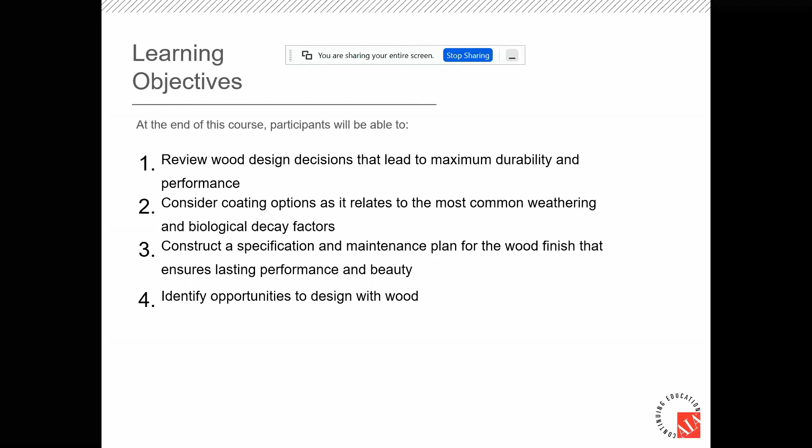So let's start with the characteristics that wood offers as a building material. I think you'll agree that wood is the most sustainable building material available to us from Mother Nature, and its inherent characteristics make it strong and flexible.

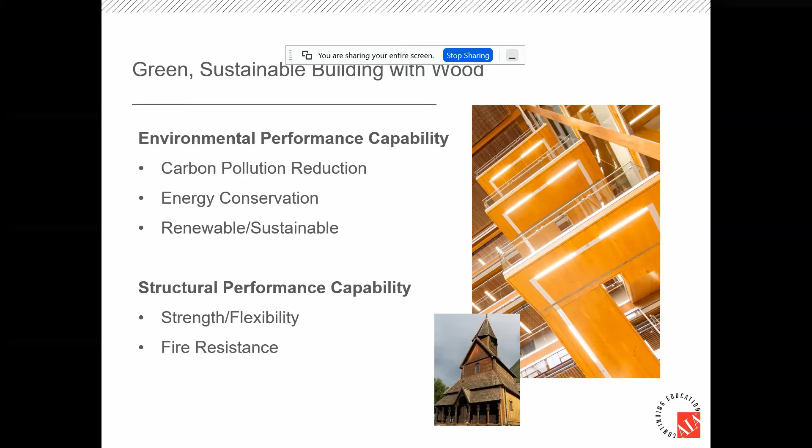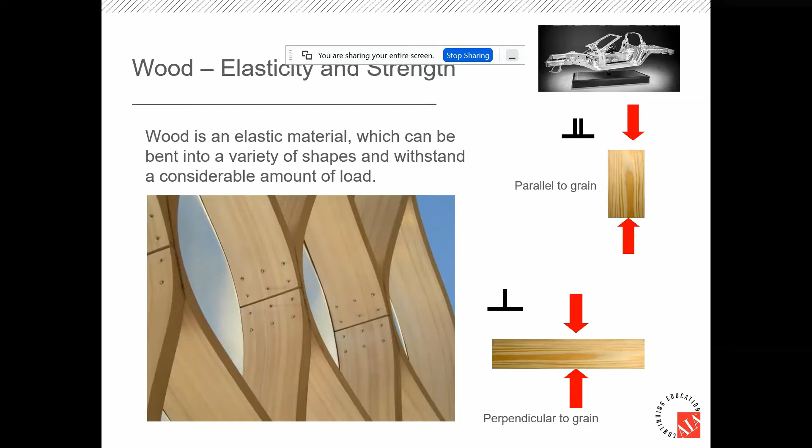Wood is very strong, especially in compression parallel to the grain. For example, an air dry piece of Douglas fir 1 by 3 inches can support 4,900 pounds, basically the weight of a family car. Also, interestingly, wood can be bent with the right combination of force, heat, and water. For example, in that image you see there, that's the Chicago Zoo, some interesting glulam pieces.

When mass timber is exposed to fire, which a lot of people don't really understand its effect on wood, the outer layer burns and creates a protective charring layer. This is wood's natural protection against fire. That char layer acts as insulation and delays the heating of the wood below it, called the cold layer. Mass timber's high density means there's no empty space that air and fire can travel in. Most wood has an inherent fire rating of Class B or Class C, and this is why wood construction members maintain their strength during fires, which cause failure of steel members designed to carry the same loads. We're going to get a little bit more about that image further into the presentation.

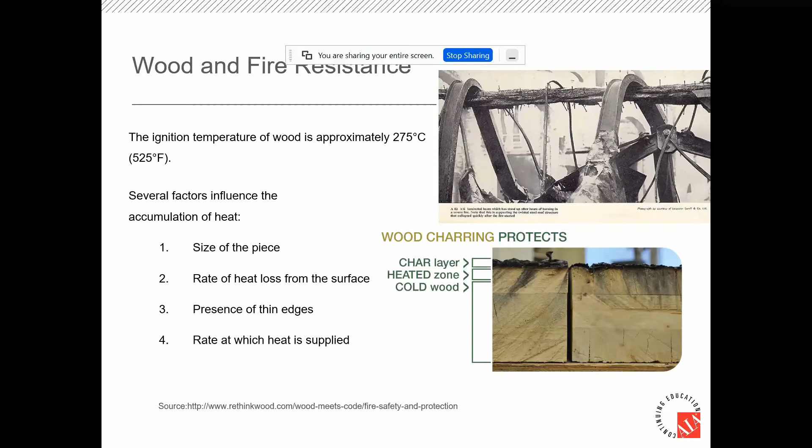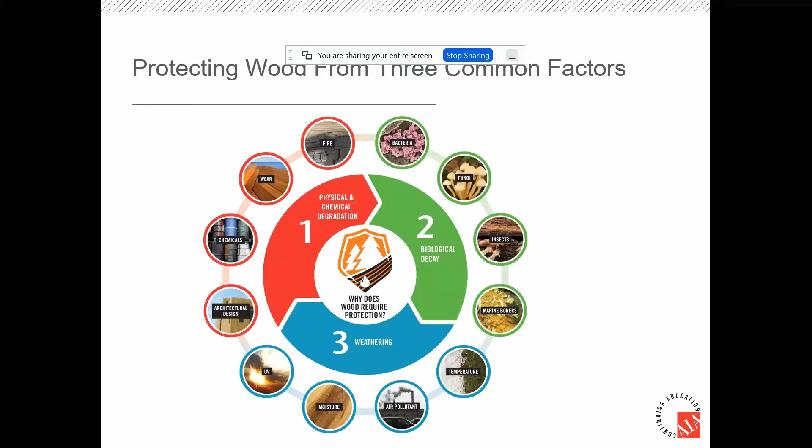So let's look at the 3 main factors that impact wood. We're going to talk about physical and chemical factors, biological attack, and weathering.

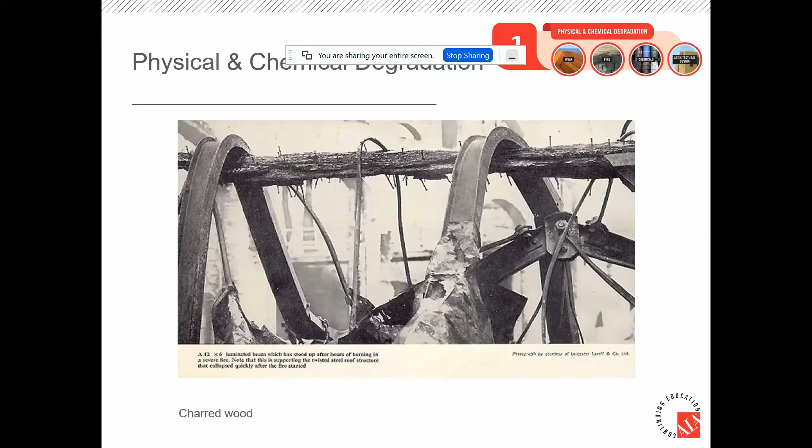As shown previously, large timbers are difficult to ignite on fire. We all know you can't start a fire with logs, you need kindling. In this case, the metal roof structure quickly collapsed after the fire started. This is actually dating back to 1931 in Chicago. After hours of burning, the 12 by 6 beam turned black, reduced in shape and size, and was still able to support the collapsed steel girders above it. You can also see the nails that are still in that wood as well.

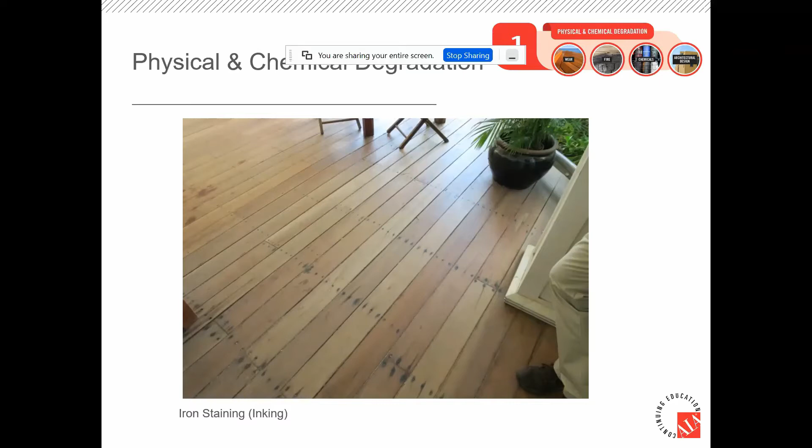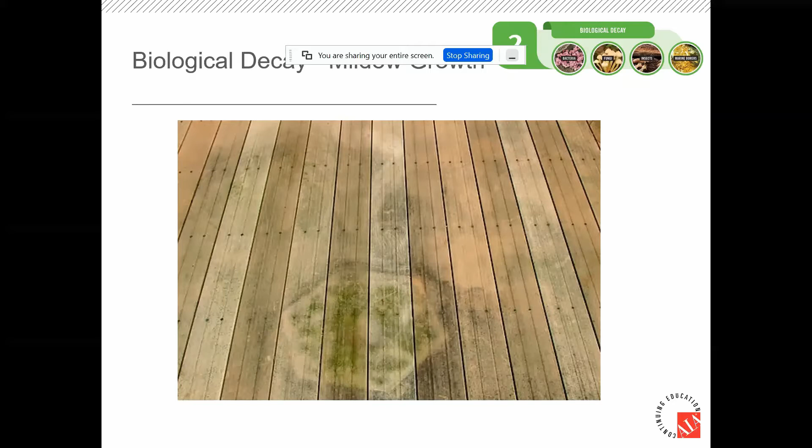Here we have a typical example of mold and mildew due to heightened moisture and the presence of fungal bodies. You might see this on the backside of your home on the deck. This shows the importance of good design and why you want to keep wood dry, especially at the end grain and at the connection points. Note the end grain failure on the railing and the fungal growth on the bridge beams.

Here you can see the testing methodology that's used for wood for moisture absorption. This is an ASTM test D4446 using a swellometer.

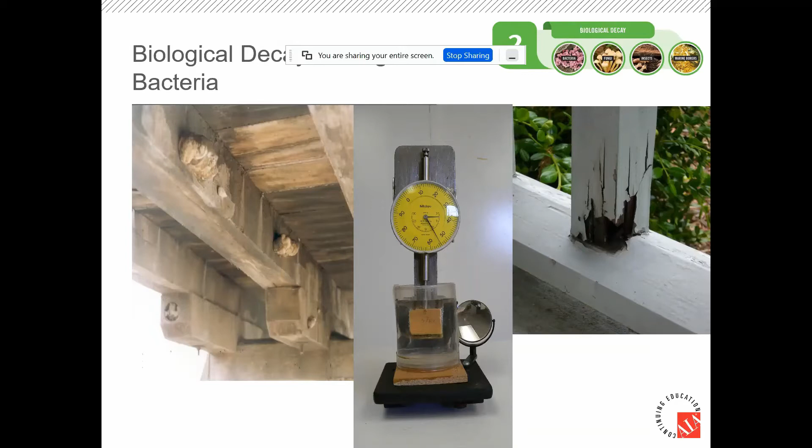So when wood is left untreated or uncoated, weathering effects run deeper than just the gray surface. Weathering from the delamination of fiber, the cracking and the checking, to blackening and mildew growth can occur. Proper treatment and coating can protect the wood indefinitely in some cases.

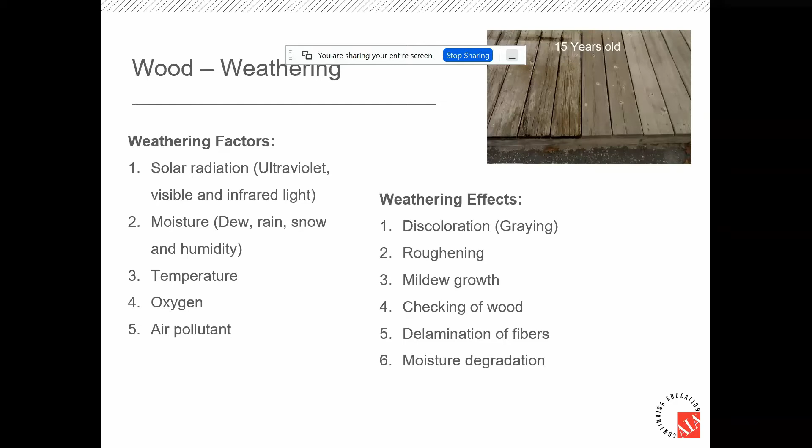To further highlight the effect of weathering, here we see boards that underwent 2,000 hours of QUV testing in a weathering machine, which equals about 4 years in Florida. This test exposes wood to extreme UV light, moisture, and heat. We use this at Sansin to test coatings, especially on various types of wood, Douglas fir or cedar.

On the right-hand side of that example, the sample was treated, and the other side was bare wood on the left. Note the difference in the graying, the cupping, and the checking after the accelerated exposure test.

So when wood is subjected to UV over weeks, the surface fibers start to change color, they erode, and they even weaken, and that's due to the lignin deterioration. The surface becomes slightly fuzzy at a microscopic level, and this loses adherence for the coating that would be applied to the surface of the wood.

Coating wood with a good quality coating saves the substrate. The color choice can have a significant impact on the UV protection. But as you'll see later, we can achieve a natural look using sophisticated coating systems and protect the wood.

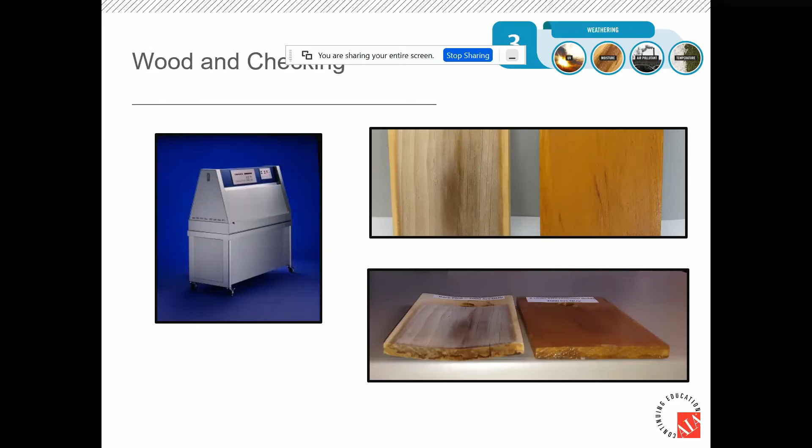Let's turn to design and how that plays a role in extending the life of wood substrate.

Lack of overhang systems expose wood siding to frequent and direct contact of water flow from precipitation. This can reduce the coating's performance. Wood remains wet and absorbs excessive moisture to the point of degradation, and this causes swelling, rot, and biological growth. An overhang system offers an opportunity to reduce direct and frequent water contact with siding surfaces.

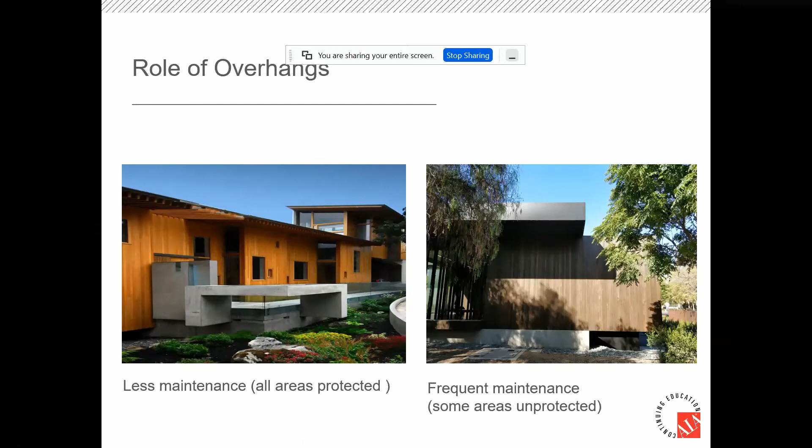To prevent frequent contact with water at the ground level, other building materials such as concrete or stone can be considered. Ultimately, you want to avoid situations where wood is at ground contact or on the ground level near a patio or floor, for example.

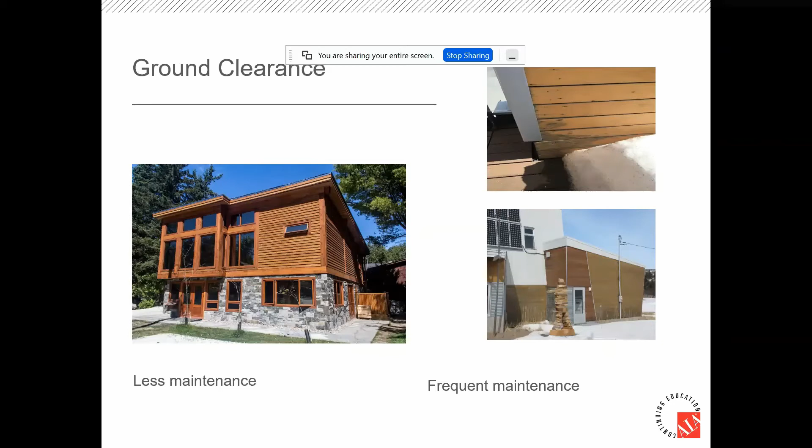A simple cap can extend the life of the substrate and increase the time between maintenance intervals.

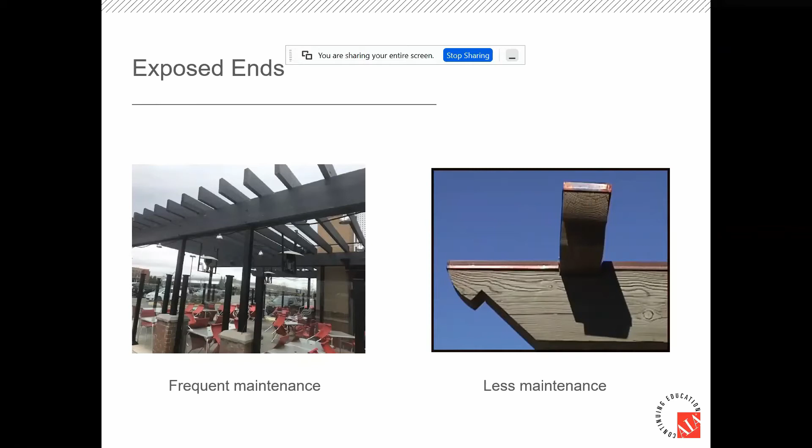Coatings have changed over the years. We went from traditional oils to water-based systems, and now finally we've advanced to waterborne formulas. Traditionally, water-based systems were fast drying. They offered low VOCs and pretty good UV performance. Oil-based systems were known for their deep penetrating benefits and their beauty.

Now, we advocate waterborne formula because it offers the best properties of both water-based and oil-based systems. With waterborne, water carries a modified oil deep into the wood, so you get the flow, the beauty, and the clarity of an oil with a strong environmental profile, easy cleanup and maintenance, faster drying, and UV stability. These are all benefits tied to waterborne technology.

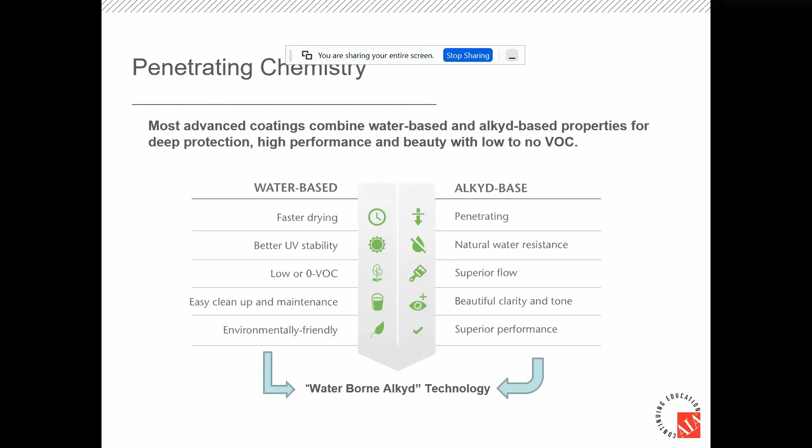Waterborne technology is designed to penetrate wood when wet, but when dry, it repels water and protects from UV. The best part is it doesn't trap moisture and it stays breathable, which means that the coating won't crack, chip, and peel.

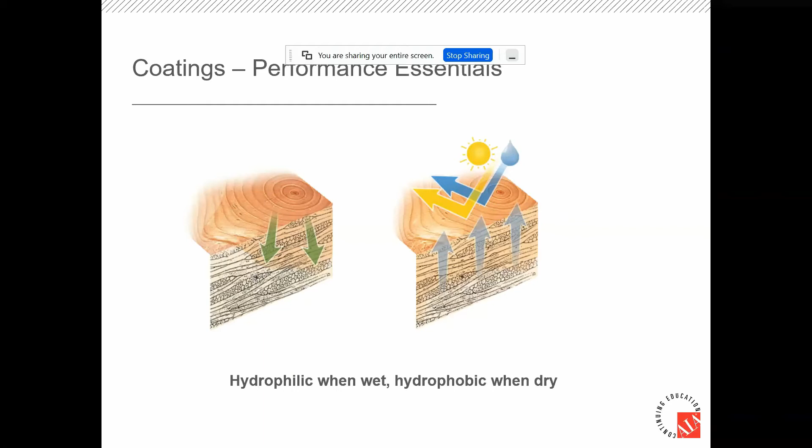Waterborne coatings have the ability to protect wood from moisture, UV, and bioattack, plus maintain a beautiful looking surface. These are hallmarks of waterborne technology.

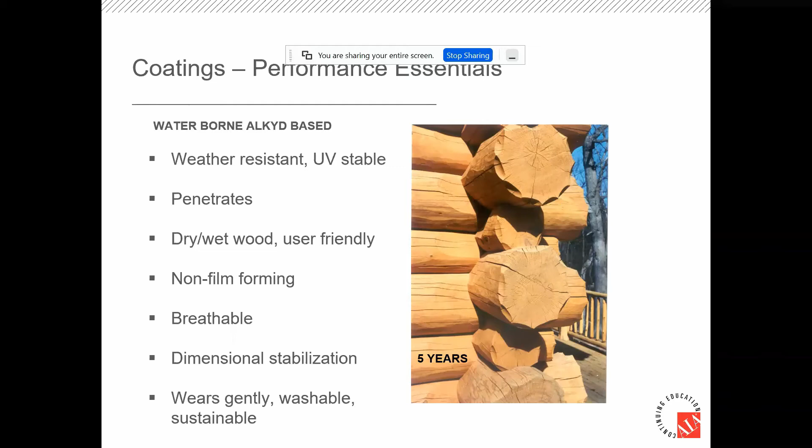Let's consider maintenance, and specifically preventative maintenance. There are three factors that impact maintenance frequency. We've already discussed the design and how that impacts the performance of the coating. So let's move on to the workmanship and the coating system itself.

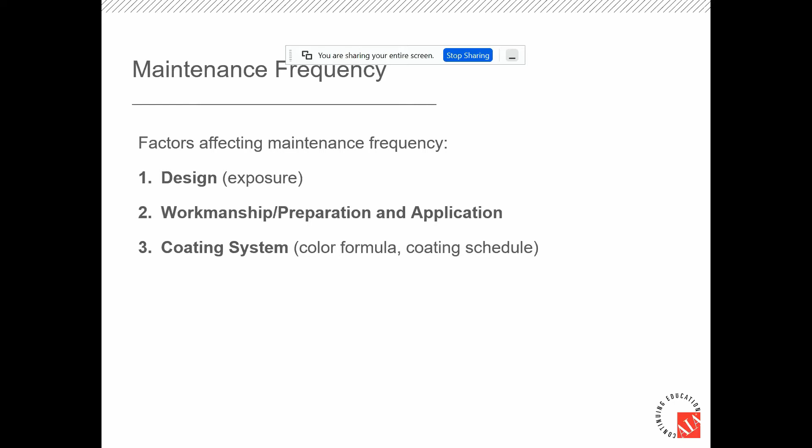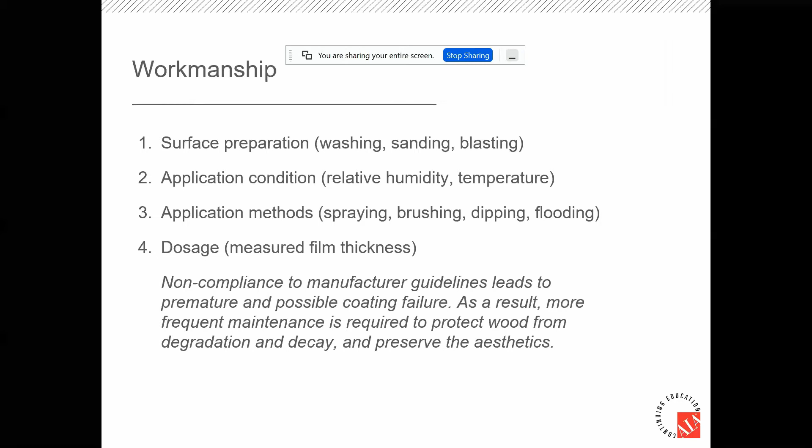There's 4 main factors to consider when working with coatings and treatments. A successful outcome is dependent on proper surface preparation, the application, and the dosage. Let's look at these a little bit closer.

Sanding is key to realizing the full potential of the coating. You mechanically sand the wood to open up the pores and allow the stain to dive into the wood. This can be done by either blasting or sanding.

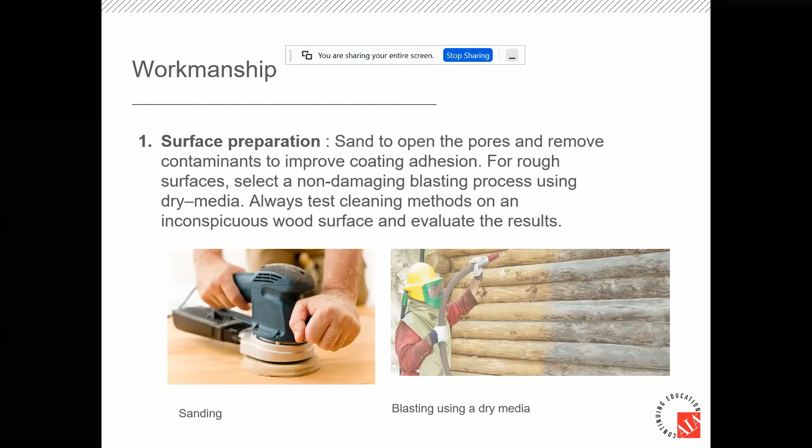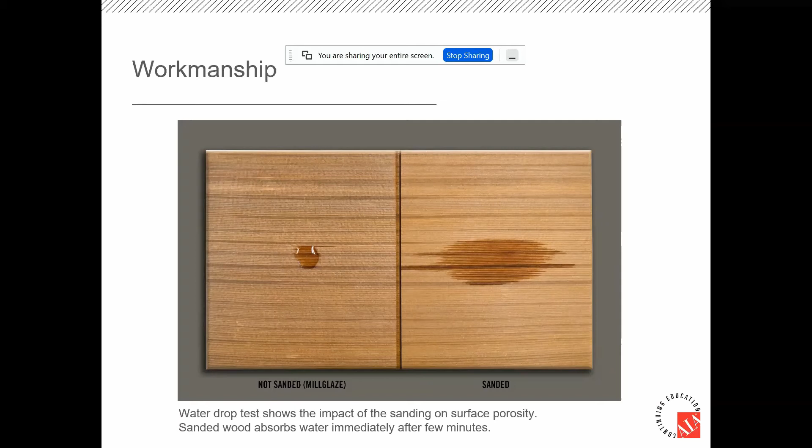We support following the manufacturer's specifications for temperature and humidity during application. Specifically, those are some key points. These will impact the outcome and the success of the coating.

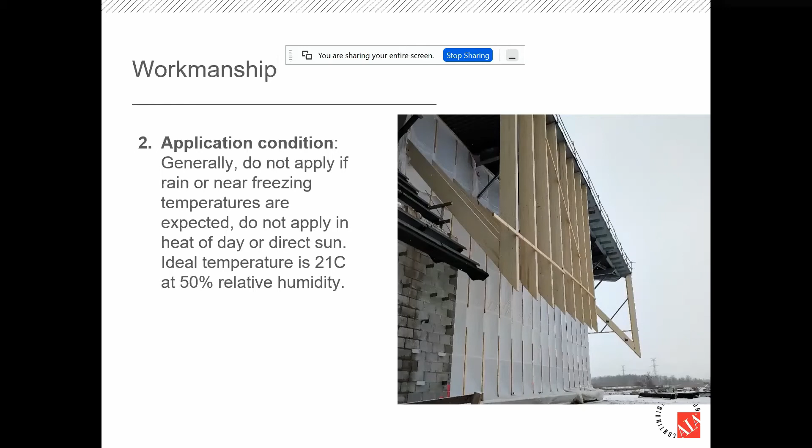There's many ways to apply wood coatings, from a traditional brush, to flooding the coating on with a spray system, and ultimately also using pre-coat machines in a factory setting. We encourage machine application in the factory setting when possible, since application occurs in a controlled environment and quality control can be managed.

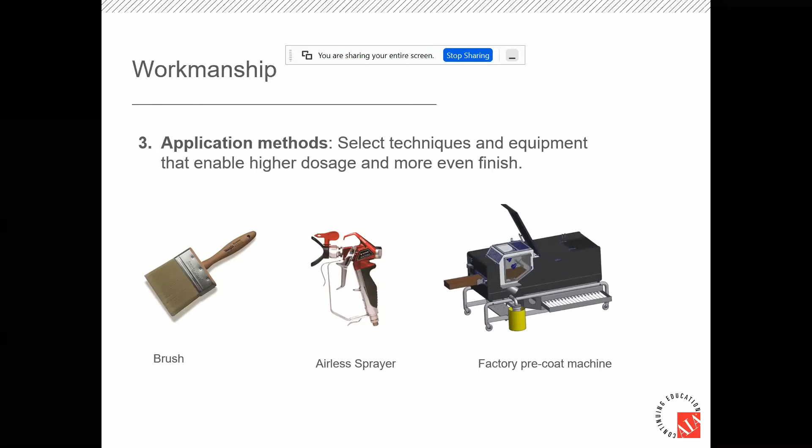Proper dosage, specifically on the first coat, can greatly improve the coating's performance. Reference the product data sheet on wet mil thickness, which will ensure enough product was used to maximize performance. Another way to measure proper dosage would be to weigh the substrate before and after application.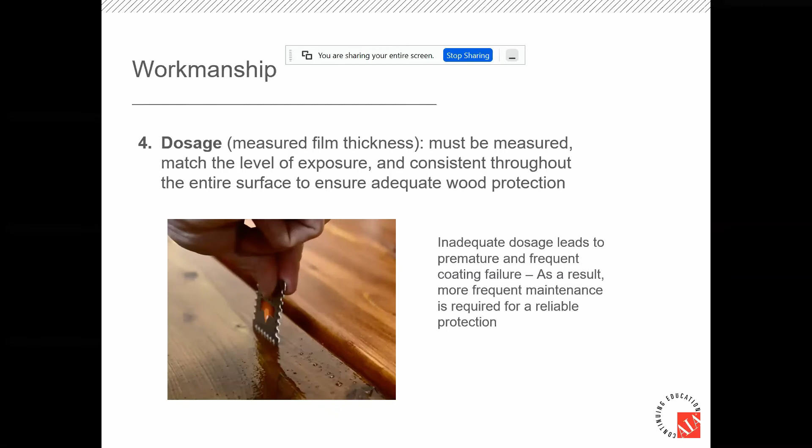Balancing beauty, durability, and ease of maintenance are the main considerations here. Through our Sansin Iris program, we work with you to consider the pigment loading to improve UV performance, and how to utilize stains and finishes to create a unique look. We also consider non-film or film building options along with the preferred sheen to develop the coating schedule, and there may be many possible outcomes, but we always keep ease of maintenance in mind at all times.

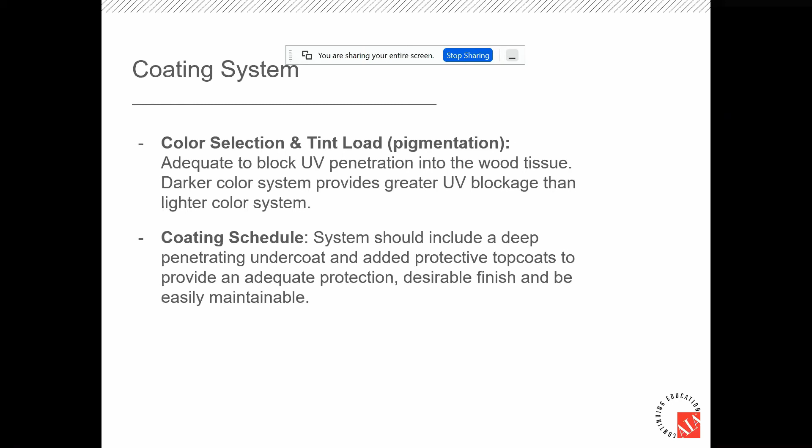For example, from Douglas fir to Alaskan yellow cedar to Accoya, there are various options for mass timber finishes that balance beauty, protection, and performance.

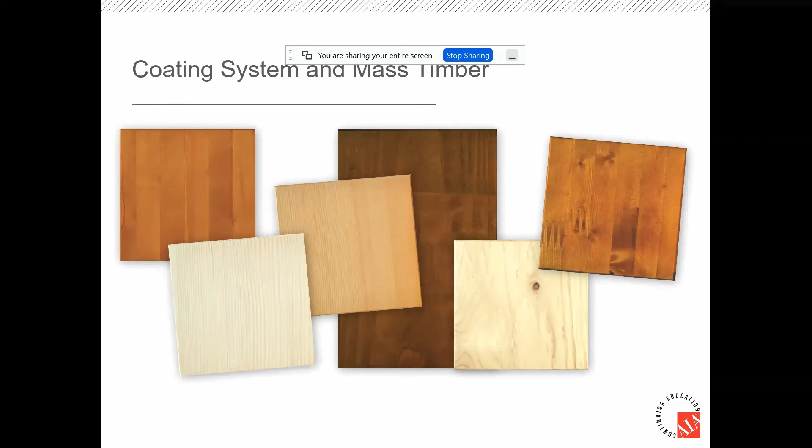So in summary, when considering maintenance, plan for annual inspection, look for signs of wear or loss of water repellency, and remember that preventative maintenance is less costly than full restoration.

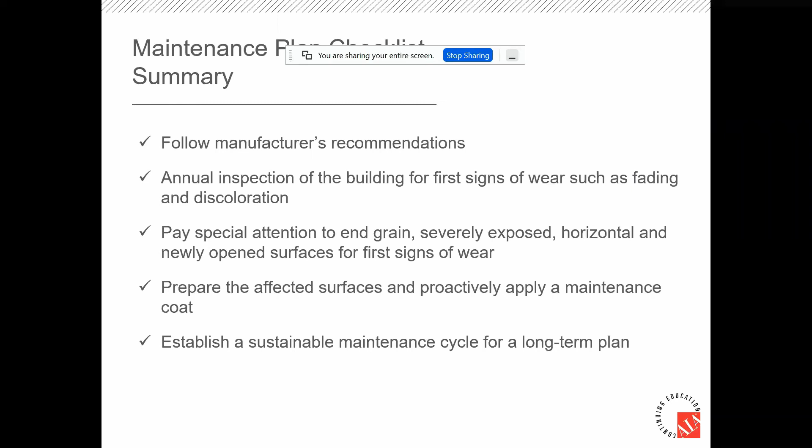I'd like to share some noteworthy projects we've been involved with in the last several years. Here we have the Toronto Montessori School. These are Douglas fir timbers supplied by Timber Systems out of Markham, Ontario. Sansin's 2-coat system, KP12 UVW with a Precision Coat SDF top coat, were applied. The top coat was custom tinted to create this natural look, and as you can see, we were able to maintain the beauty and clarity of the wood.

This project in Amsterdam highlights the use of a weathering treatment called Wood Force. This allows the wood to grey naturally and mitigates damage from moisture. In this image, you can see this picture was actually taken some 5 or 6 years after the application.

The Videotron Stadium in Quebec City incorporates 92 glulam needles supplied by Nordic. The KP12 was factory applied, and a final coat of Sansin's Purity Clear helped create a brilliant finish.

This one's near and dear to my heart, in my hometown, London, Ontario — it's our local ski club. Here we see two parts of the building: on the right-hand side is the old part of the ski chalet, and on the left is the new chalet. We applied the SDF Autumn Gold on the right-hand side, and on the left-hand side a fire retardant was required for the soffits. We were able to use the fire retardant coating tinted to a similar color as the SDF on the right-hand side to blend the look together and also achieve the building code specifications for the project.

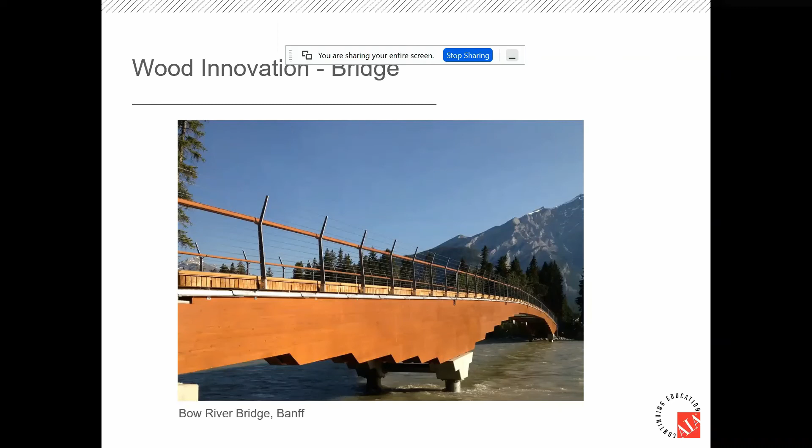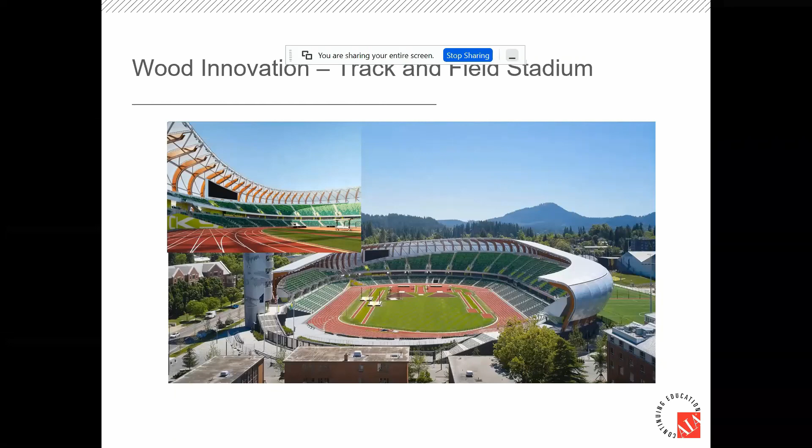This is Hayward Stadium in Oregon. It consists of almost 500 glulam pieces, supplied by Western Archrib of Canada and designed by SRG Partnership of Portland. This project used KP12 UVW and then 2 coats of our film-forming, long-lasting ENS finish. That first coat of ENS was applied in the factory, and they field-applied the final coat of the ENS system on site, which had a half-tint load of golden wheat.

This project was designed by Lubor Trubka. It's a First Nation project located in North Vancouver, near some of you joining us today. By pairing mass timber elements such as glulam columns, beams, and stairs, and nail laminated timber panels, with traditional materials like Douglas fir for the siding and red cedar columns and beams, the building expresses strength and resilience coupled with a sense of well-being, reflecting both local history and the native landscape.

Inside and out, Sansin was featured on this stunning building, with products ranging from our SDF product to our foundation and ENS Optimum Clear for a high luster film build finish. Then for the interior, our gymnasium grade floor finish was used for high durability.

And lastly, this is a 150,000 square foot project designed by Michael Green Architecture to be one of the largest zero carbon, zero energy buildings in North America. Catalyst anchors a new South Landing neighborhood in Spokane, Washington, which is a model for sustainable development, and the goal was to bring out the character of the wood and add to the sustainability requirements of the project.

Sansin products were used throughout. Inside, Sansin KP12 UVW and SDF top coat were custom tinted and used on the lighter areas, while Purity Interior Stain, tinted to a midnight color, and Purity Interior Glacier, a non-yellowing clear coat, created the bolder accents. The exterior CLT soffits, as well as the Alaskan yellow cedar cladding and columns, were coated with KP12 UVW and our SDF top coat system.